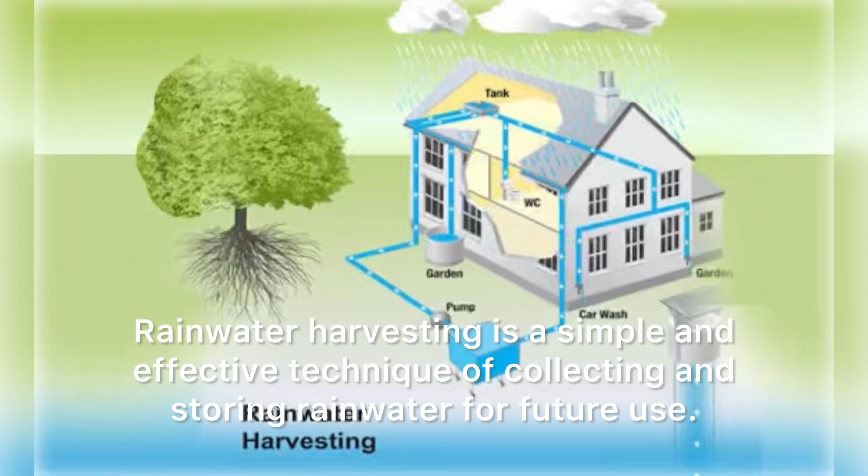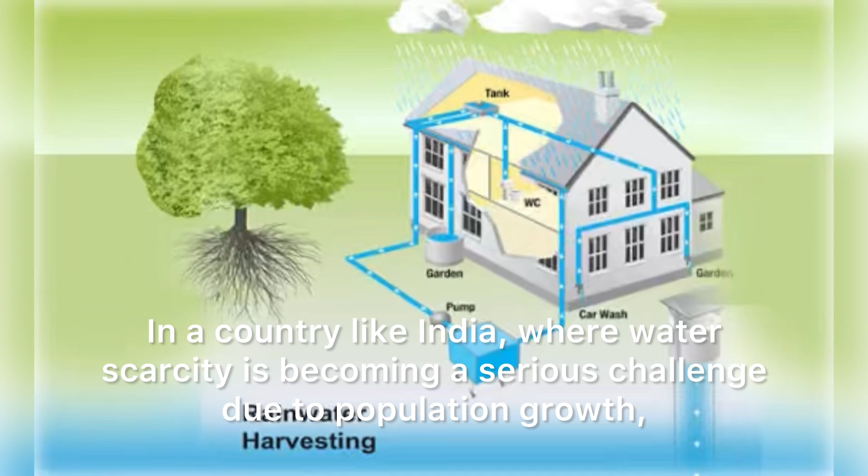Rainwater harvesting is a simple and effective technique of collecting and storing rainwater for future use. In a country like India, where water scarcity is becoming a serious challenge due to population growth, urbanization, and climate change, rainwater harvesting plays a crucial role in water conservation.

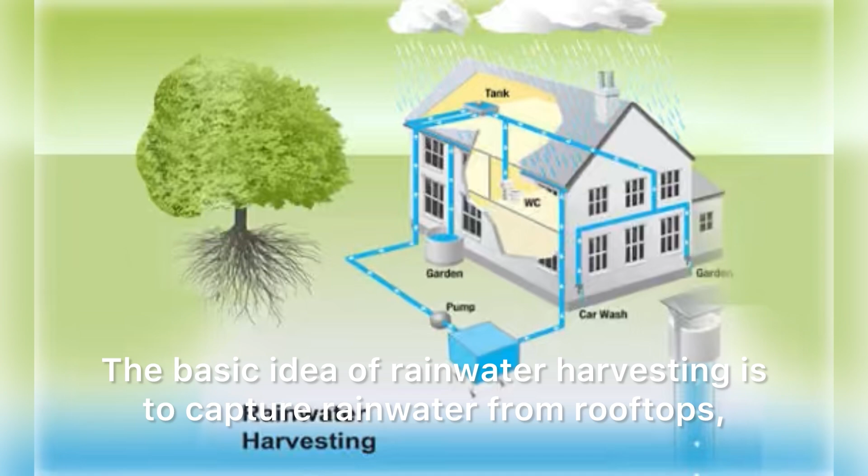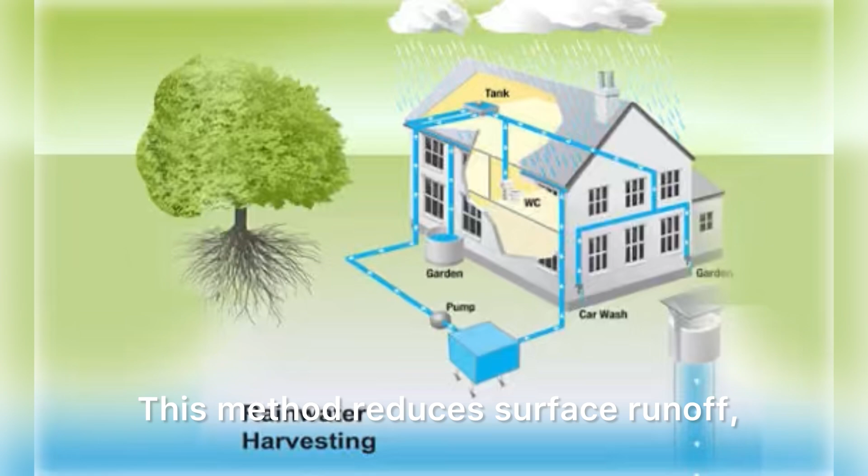The basic idea of rainwater harvesting is to capture rainwater from rooftops, open grounds, and roads, and store it in tanks or allow it to recharge groundwater through pits and wells. This method reduces surface runoff, prevents flooding, and increases groundwater level.

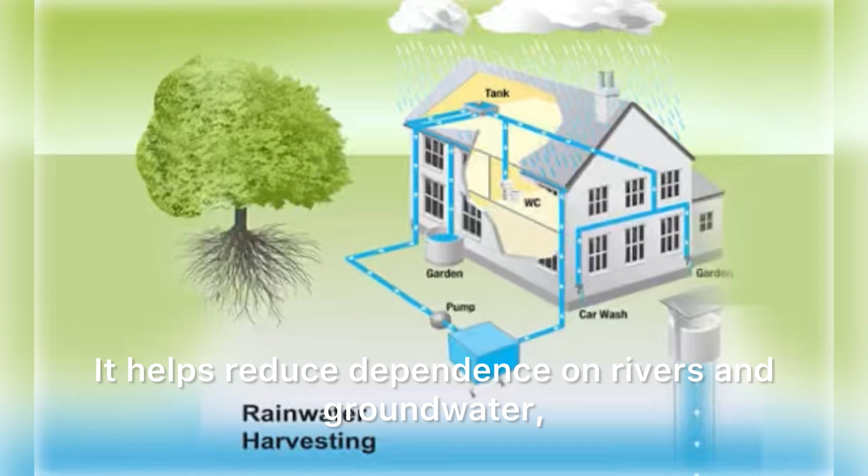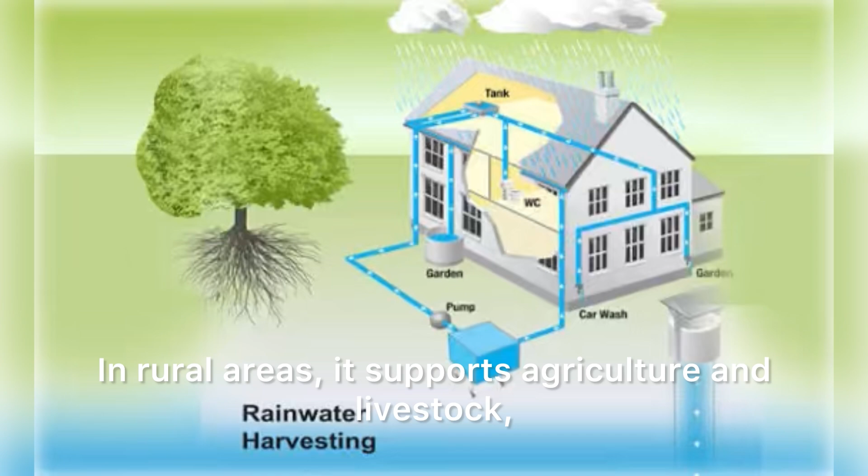One of the biggest advantages of rainwater harvesting is that it provides a sustainable solution to water shortages. It helps reduce dependence on rivers and groundwater, which are already overexploited. In rural areas, it supports agriculture and livestock, while in urban areas, it meets domestic needs like washing, cleaning, and even drinking after proper treatment.

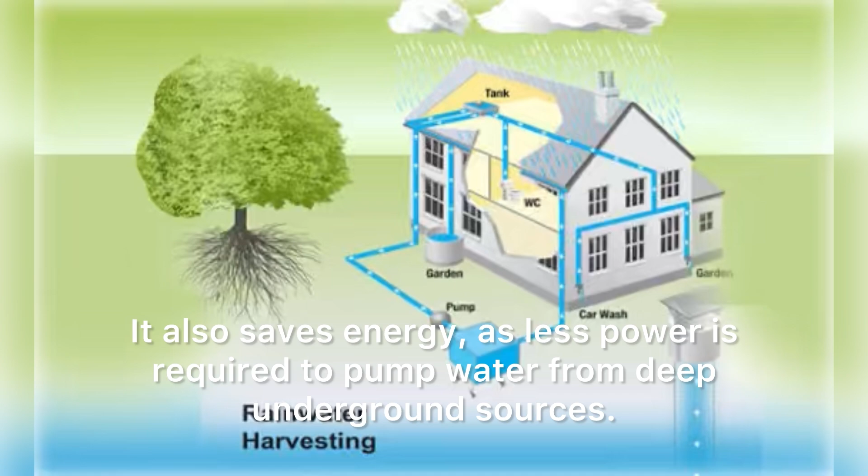From an environmental perspective, rainwater harvesting helps recharge aquifers, improve soil moisture, and reduce erosion. It also saves energy, as less power is required to pump water from deep underground sources.

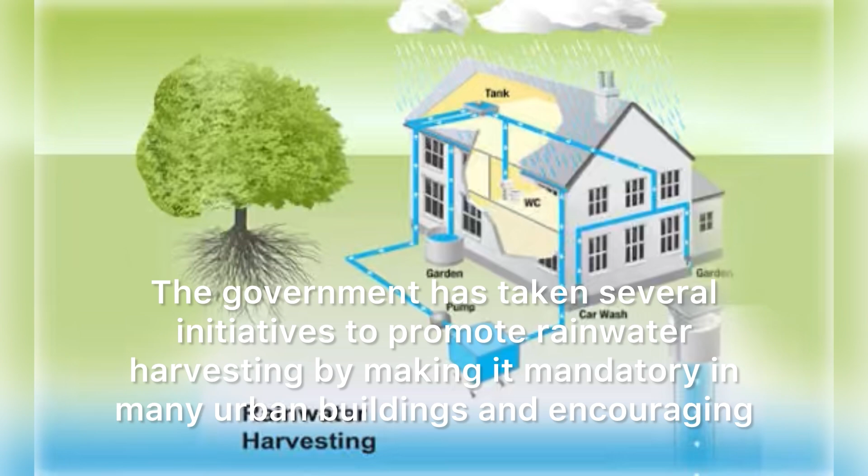The government has taken several initiatives to promote rainwater harvesting by making it mandatory in many urban buildings and encouraging community-based water management. However, public awareness and participation are still essential for its success.

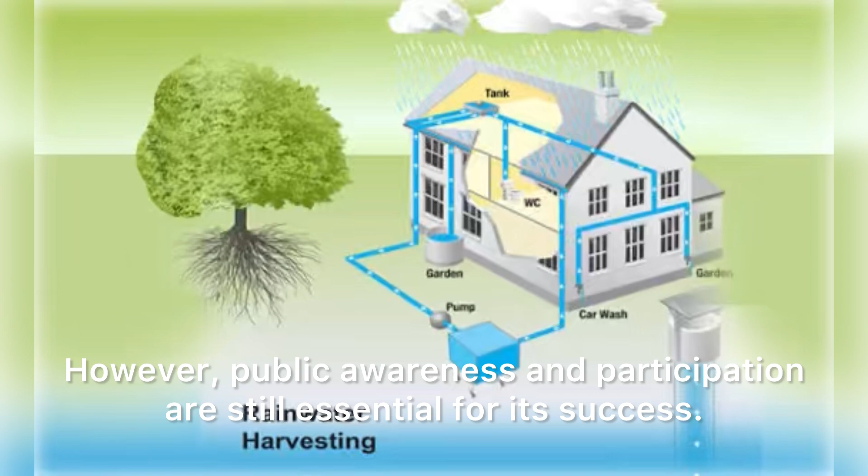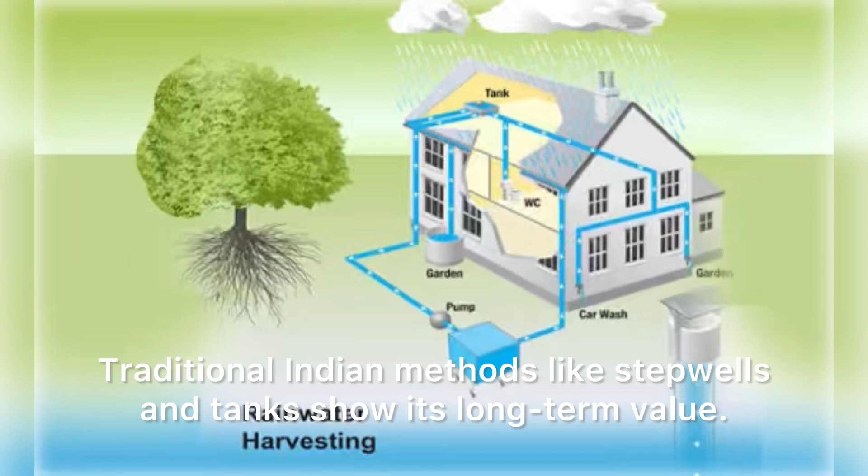Rainwater harvesting is also cost effective and easy to maintain. Traditional Indian methods like stepwells and tanks show its long-term value. When adopted in homes, schools, and communities, it promotes awareness, self-reliance, and collective responsibility while helping solve water scarcity sustainably.

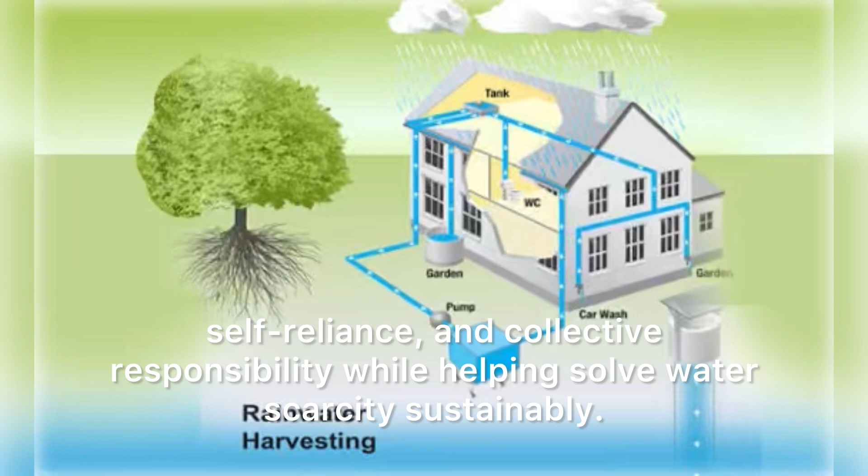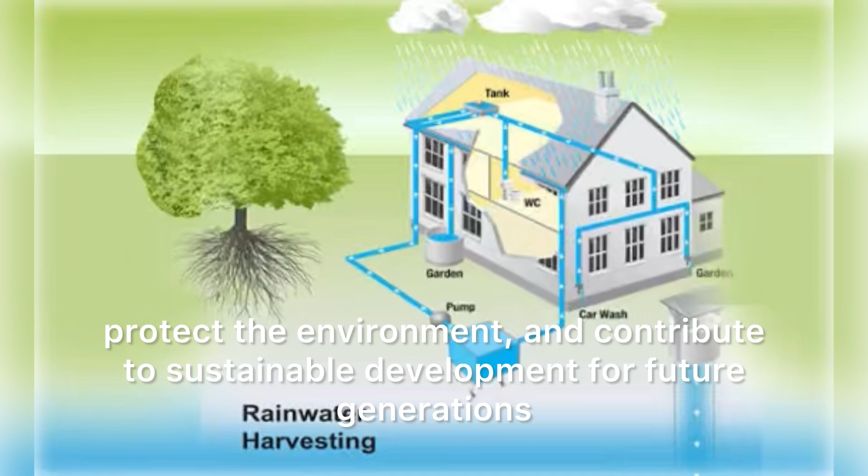In conclusion, rainwater harvesting is not just a technique but a responsibility. By adopting it at the individual and community level, we can ensure water security, protect the environment, and contribute to sustainable development for future generations.